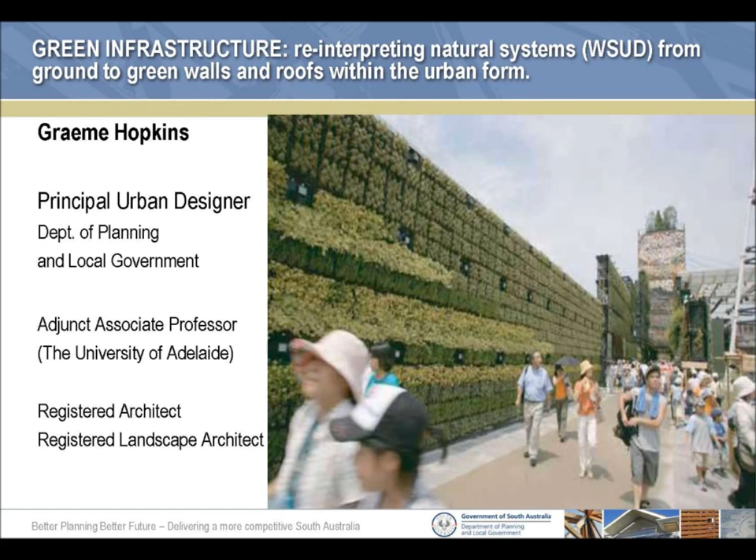I'll be looking at some of the natural systems, not all of them, and briefly talking about some of the interesting work we're doing at planning, especially how we can build up density in the city while maintaining our open space.

First of all, a city is an ecosystem. I'm not a scientist, so I have a very simple definition: an ecosystem is a community of living things interacting with non-living things. I understand that, and I think that's a really simple way to put it.

These systems are considered open systems, as both energy and matter are transferred in and out, resulting in change and evolution over time. That last phrase is really important nowadays, as our ecosystems and weather patterns are changing. Normally this happens over a long period of time, but now it's speeding up, and we have to get in and work with that quickly.

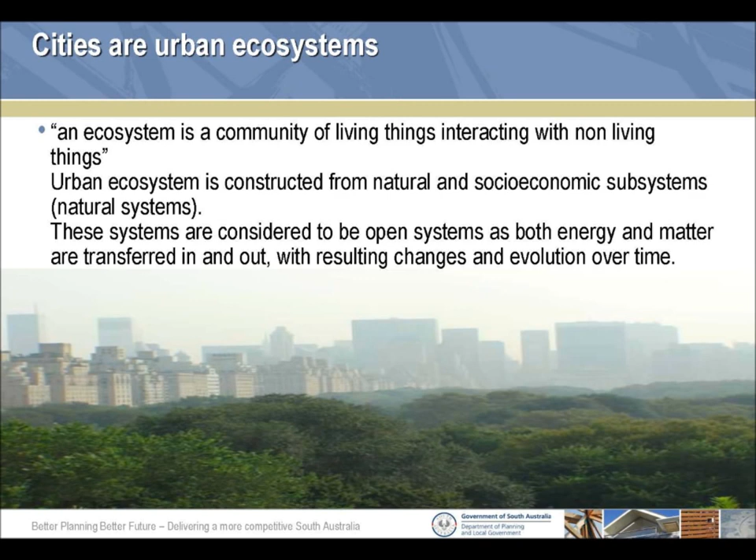So that's one premise. I work on two premises: a city is an ecosystem, and the other is that a city is a water catchment storage area.

If you look at the natural system, you get about 20% runoff of water, or 20% base load of water from the ground, and 27% runoff, like Kangaroo Creek Dam, so about 40% of the rain is caught in that dam—that's if they're not topping it up from the River Murray.

But in a built environment, when you look at the city, your base flow is only 5% because there's very little infiltration, while your surface runoff is 58%. When you put those figures together, the city makes a lot more sense—you've got 63% catchment compared to 47%.

So if we're using those hard surfaces, water runs off, you don't lose it. But the trick is how do we store the water within the city so we can reuse it? There are things like roofs, vertical walls, storing water in road pavement and so on, so we can recover that. Those are the two bases I'm working on.

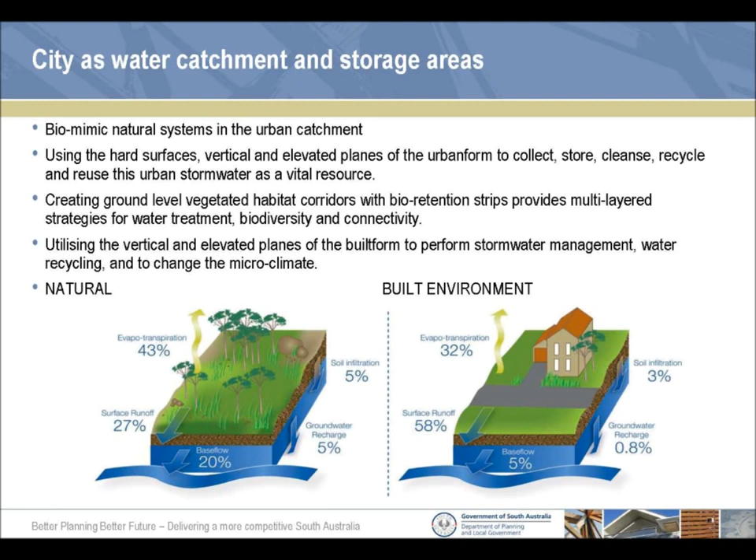This falls into what I call green infrastructure, a common term happening around the world now, and I'm introducing this to government, which is an interesting process in itself. What green infrastructure means, as I see it, is using natural systems in the urban environment.

We're using these natural systems to replace existing infrastructure, such as in this example looking at water. Our cities can't replace the infrastructure—it's too expensive—so we need to find ways of doing that naturally while at the same time enhancing the built environment around us. We can augment this, and it can be a great cost benefit to the state or the city.

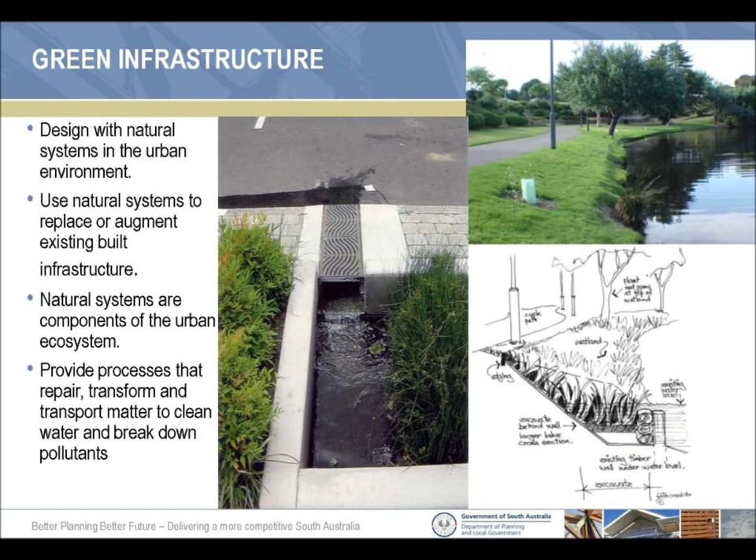The rainfall in Adelaide is going to be quite different from the way it is now. We're starting to see the effects—we'll get about the same amount of rainfall, give or take whatever scientists you believe, but it's going to come in bigger, more intense amounts.

In the top diagram, the purple water is the rainfall and runoff we normally get on paved areas. What's going to happen is we'll get that rainfall in bigger loads, so the blue on top becomes the water volume—those pavements catch a lot more water. If we don't improve the infrastructure to take that water away, we'll have nuisance flooding.

So there are real issues in the built environment. Places like Rundle Mall will get a lot more water on its surface, and the infrastructure won't cope, so we'll get wet feet walking down there, and in an extreme case it might flood into the shops.

So what we're looking at is the bottom diagram, where we reduce the catchment—the paving area. With that intense rainfall, we get a smaller, more manageable runoff, but we put it into the ground, into biofiltration strips, letting the water clean through these systems and soak in. It's similar to work Taylor Cullity did in Melbourne. We're reducing the catchment, and we're currently working with Mount Gambier Council on their new plaza areas using this technique.

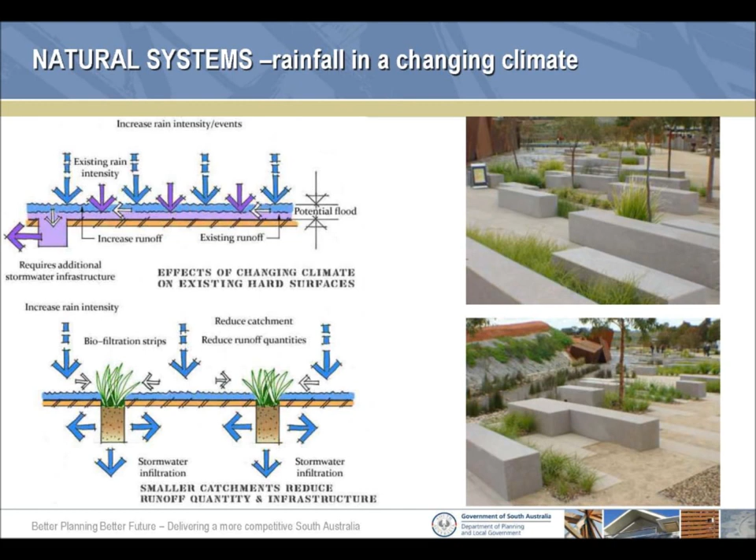So that's sort of looking at rain. Other things we're looking at is how you use trees. Trees are a natural system - they're a heat pump. There's air circulation around a tree within its canopy from its transpiration, with different humidity levels and air pressure, so you get a natural circulation.

This is some work being done, was in America, was for Dubai - whether it's been built now with the financial crisis might be another story - where they're building giant artificial trees, where you actually bring in the hot air. The hot air might be up there at 40 degrees. You spray mist water, which reduces the air temperature, you get a change in air pressure, and you can bring the cold air down through a downdraft chimney effect to bring the temperature back into the mid-20s at the ground.

Singapore are looking at this in their new parkland developments on their waterfront, and they're looking at these artificial trees that are 7 stories high.

Taking that sort of approach - and this is a really old technique. If you remember back, people of my vintage, the old Parliament House in Canberra had the Senate and House of Representatives courtyards with major trees in the middle, designed to pump out the hot air. And if you look at the Treasury building, it did have big scale trees to do it. It's a very old technique.

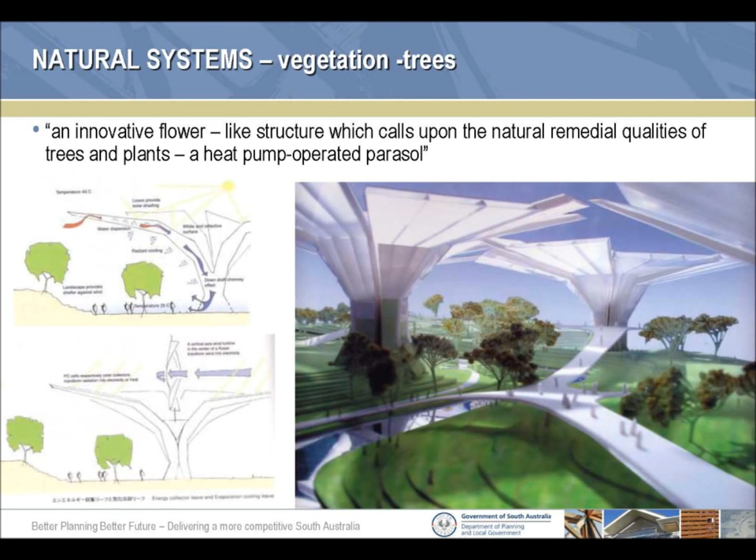Taking that principle, we can look at places like Rundle Mall and outside malls. They're going to become really less populated as temperatures rise and people worry about skin cancer. People are going to move to the internal malls, which have other social problems because they're private land and can exclude different population groups, but they're air conditioned and comfortable.

But if you look at the mall, take that shade structure there - I quickly just did in principle what you could do. You can collect the water on the roof, take it down, store it under the paving, put solar panels on the glass. That will pump the water back up, mist it out, and you start to get air temperature changes and use the downdraft chimney effect to bring cold air and air condition these malls. If you had a series of these, the actual temperature would be reduced, you could attract people back, and there's an economic advantage to those businesses.

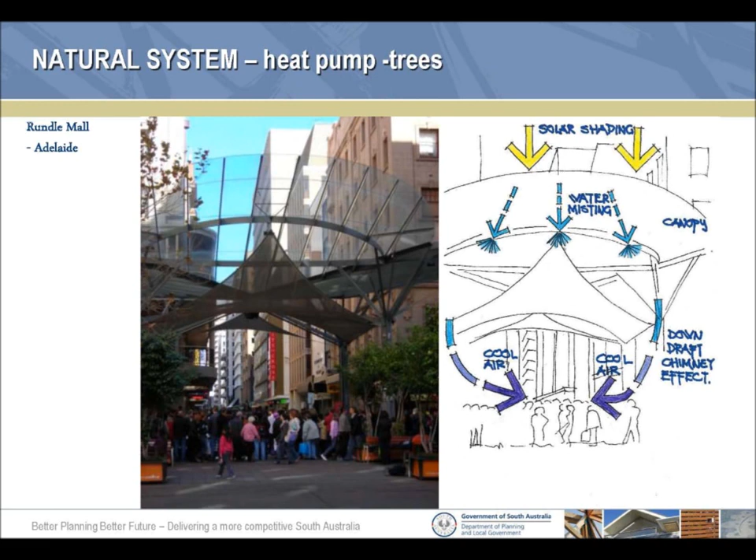So we've got to look at how we handle the public realm, and it's going to be quite different to how we're doing it now. If you take these natural systems and integrate them, they will start integrating with each other, and you can actually treat pollutants and stormwater runoff and so on.

This is a very quick conceptual sketch of a project we're working on with the University of South Australia. We've just got some grant monies to start the preliminary design work where we're looking at treating water, storing it under the road pavement within the airspace of the gravels, using street trees for shade effect, reducing the heat island effect off the pavement, using cool pavements, and recirculating that water back into the buildings as reuse water.

We also start looking at using green walls and green roofs. Green roofs are extremely important for stormwater retention and so on, and green walls are very similar, but we can use those green walls to cool the sun on the walls surrounding this laneway.

That brings me to where my interests are even more developed - looking at green roofs and walls. Green roofs can be used as urban forms; you can do any shape you like, anything nowadays, because the technology's there. These dome roofs are the California Academy of Sciences, where they've actually used the topography to cool air and bring that down into the building to air condition it.

So there's lots of benefits. We can increase shade and insulation, reduce energy costs, and in multi-storey buildings we only have to reduce the amount of energy by a minute amount to get major cost savings.

As Stefan said, the sides of the tower are exposed, but on a tower like the Chicago City Hall, you just shade the top, and that has an effect for only the first few floors. So to me, then, we really need to look at the walls to have greater benefits.

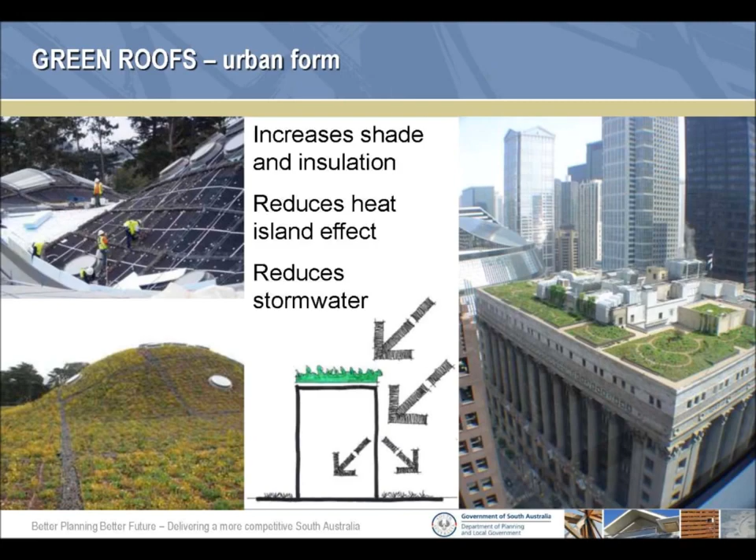But just looking at natural systems we can use on the rooftops, we can use the natural system of natural cooling by plants to cool the ambient temperature around photovoltaic cells. They can actually work up to 20% more efficiently than on a conventional roof. This was a 5-year study by German scientists who have done this work.

And if we were able to say, well, we can get 20% efficiency in a new photovoltaic cell, the commercial world would take that up and say this is a great benefit. We can do this with a green roof, and we have lots of other benefits.

We can actually put constructed wetlands up on the roofs, and this example here is a John Deere factory in Germany, where they actually take the water out of the production line, take it up on the roof, cool it, treat it, and then reuse it back into the production line.

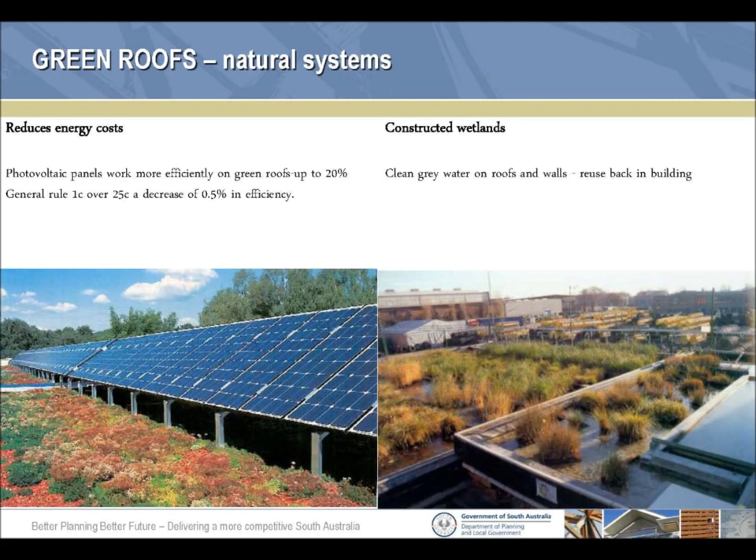So the technology's there. We can actually have a lot of our wetlands up on top of building roofs instead of taking up a lot of ground space, which can be used for other functions. And in a compact city, as we talk, ground space is critical. So if we can use the building fabric to do the same jobs, then that's what we're doing.

If we look at living walls, they give us urban texture to the streetscape and the form. But I think they have a big benefit to the energy use of the building, because if it's a multi-storey building, you've got a lot more surface area you can treat. Technically, it's a bit more difficult. It's not impossible, and with the new systems being developed, the cost is coming down. But again, they've got similar benefits, reducing the heat island effect, and so on.

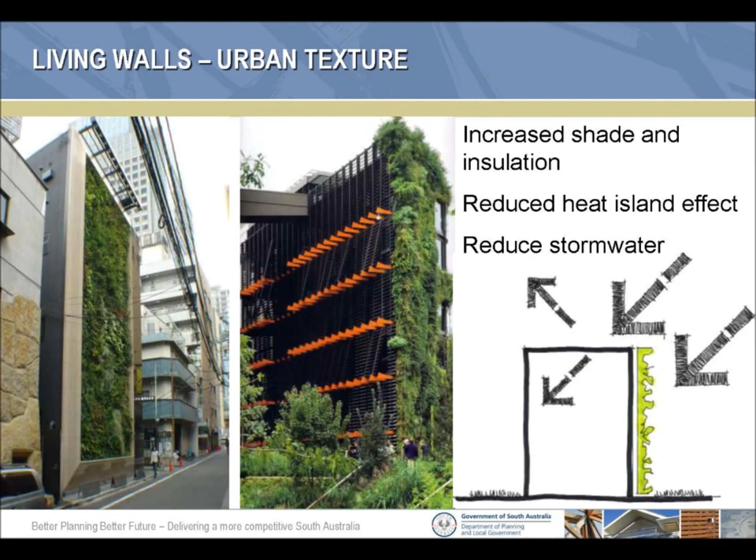But if you look at the living walls, the natural systems, you can actually look at a multi-storey building, and that's a section here on the right, where you can actually use the living wall as biofiltration. You can take the grey water out of that floor, run it through the system and then bring reused clean water back into the next floor and so on. So you get this cascade effect happening right down the building. This technology is available. We can do it now.

And on the left is a vertical wall with a fish pond at the bottom. This is in Toronto, in the Canada Life Insurance Company, where the water from the fish pond area is recirculated up to the top of the living wall. It then cascades down through the living wall.

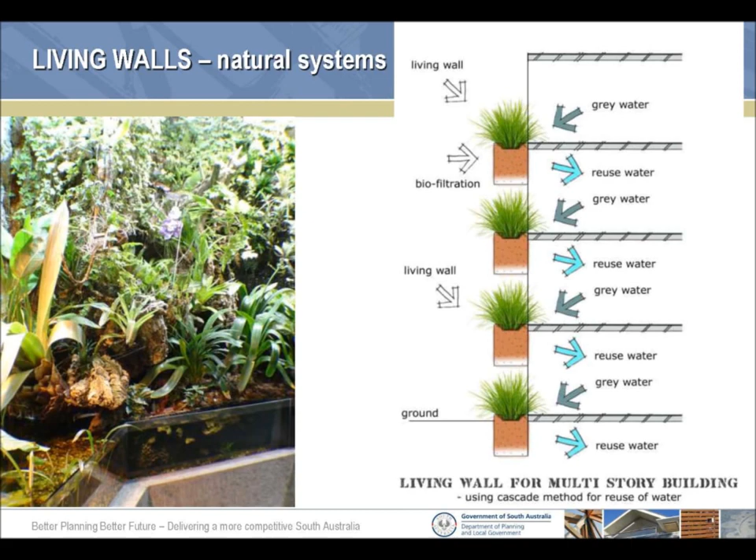The fertilisers, the nutrients, come out of the water. The plants use that as their fertiliser. The water comes back down to the fish pond clean, and it's just a constant cycle going on. So we can actually look at these ecological principles to look at our building facades, and we can do this if we really want to.

If we put those two together, we get this ground roof connection, and this is where I see a great opportunity for Adelaide. This building's in Fukuoka in Japan. It's quite a famous building, stepped there.

But if we had building envelopes and control around our city squares, with buildings that step back with greenery, those city squares would have 4 to 6 times more biomass, and the cooling effect of that would have an enormous effect on the city itself. And we've got 4 major squares and so on. So there's really interesting urban forms to look at in here.

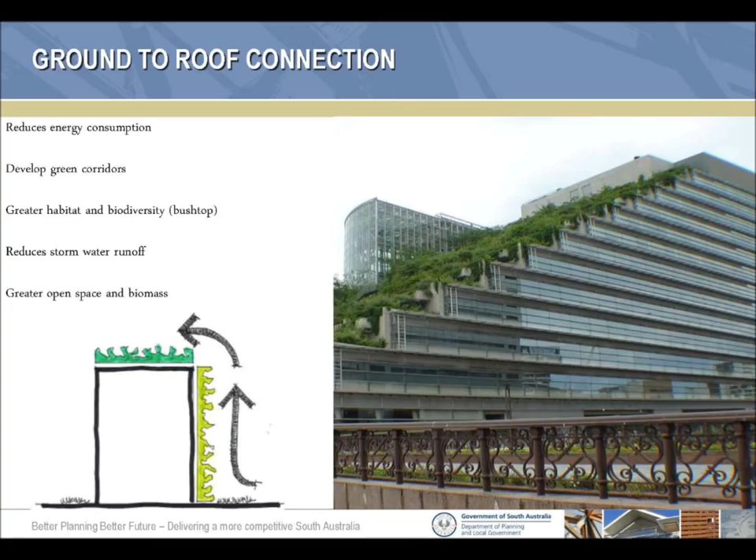If we look at these living walls and green roofs and say they're bush tops, they're ecological habitats, and then say, well, they're the habitats of what was originally here, and this is what I call a bush top. It's basically looking at what was here in the CBD before we converted it. And we put that on our walls and on our roofs. We can actually start getting a mosaic of a pattern running through the city.

The city had migration patterns for insects and birds through it before we built it. So my work is to look at them and to actually set up these stepping stone corridors so we can get those migration patterns happening again. And I'm using a metapopulation theory developed by Paul Ehrlich back in the 70s. This is being developed in California at the moment.

It's the only other place in the world where I know we're working on the same sort of principle, where you don't have to have a corridor that's constantly connected. As long as the distance between the roofs or the habitats is within the migration or flying distance of your targeted species, then they will move along and colonise these areas. So we're looking at the CBD, there's various routes we're looking at the moment.

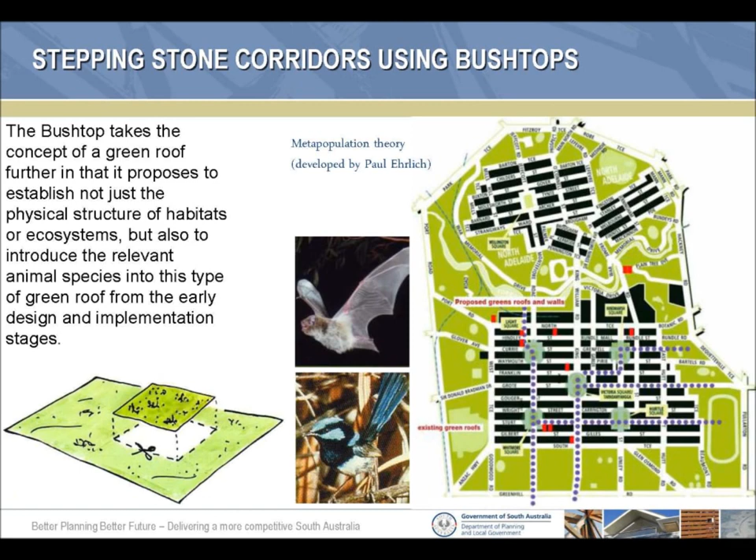This is probably quite important, that we're looking at increasing the open space while we increase density. As this is about the compact city, the top diagram shows how much biomass was there before we developed. We do the general housing sprawl, you get about 25% of biomass left. But if you tilted up that backyard, you actually create more space. You can then put another building on, or another 2 or whatever.

So you can increase the density, and the bottom diagram shows a 3 to 4-fold density increase. We get 25% more biomass open space than we started with pre-development. And it's just a simple calculation of surface area. If we use roofs and walls, we can get an enormous amount of biospace. The only downside is we don't have a lot of deep-rooted zones. But if we do careful design, we can do that.

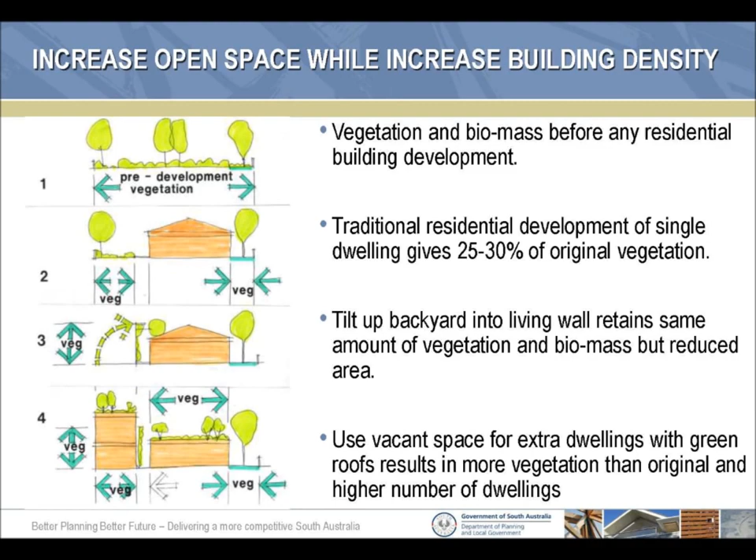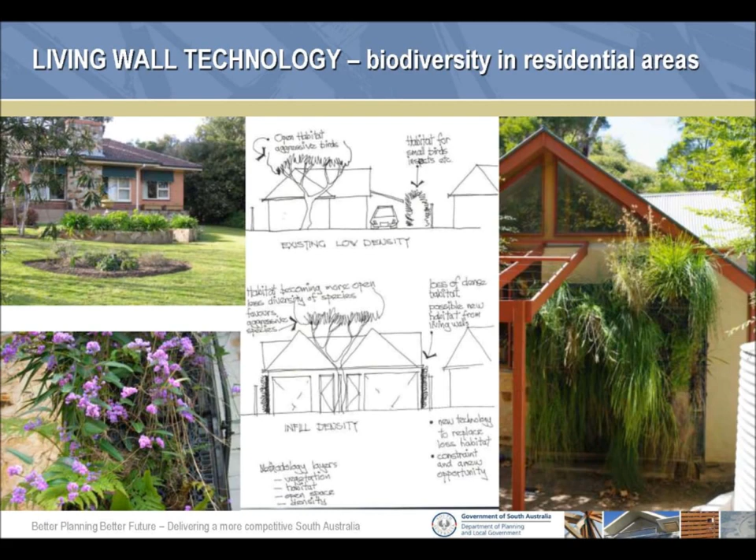When we redevelop, we put 2 houses on the site where there was 1. That hedge is the first thing to go. So that habitat disappears. And what we're saying is this green wall, living wall technology could be put on the house or on the fence to recreate that habitat. We can increase that density when we can maintain the urban habitat. And that's a really important factor. And we take that one step further.

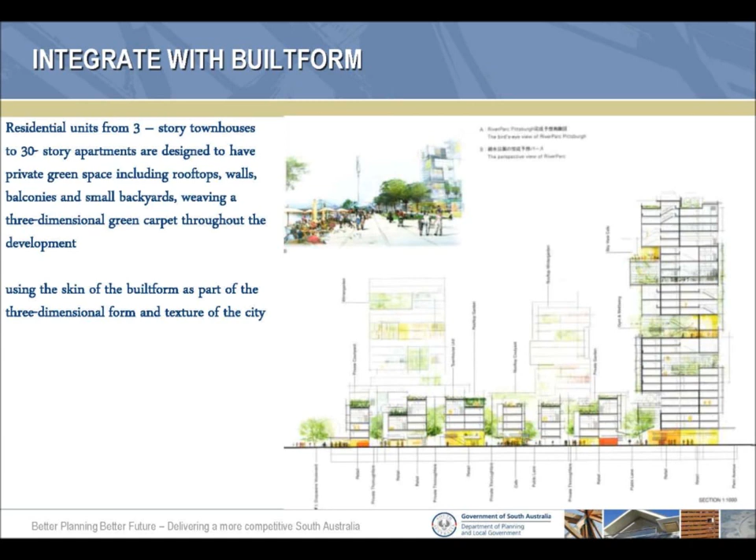We look at really dense, more like TOD-type developments where we can put green roofs, living walls, green balconies, parklands within the city. We form this three-dimensional open space system. And this is really what I'm working towards in the Department of Planning, to get this three-dimensional open space system, because we're used to a two-dimensional everything on the ground, but to get density and to get more open space, that's what we're up to. Buildings should be more.

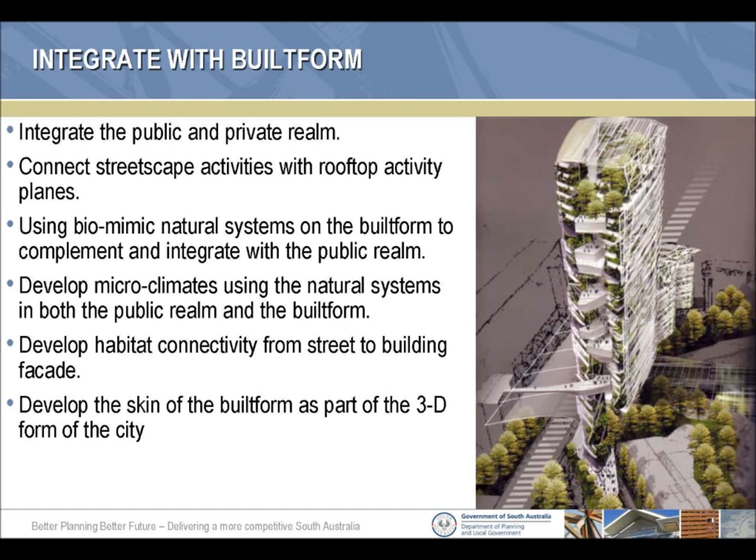This is a Ken Yeang building, as people would recognise. But we need to integrate the public streetscape with the building facade and the rooftop and put it all together. And we're looking at things like the heat island effect and the cooling effect of the city. We started a research program so we can get enough information together in the next 12 months to 2 years to start building envelopes where we can target putting green onto the building in strategic places to absorb the heat or cool the area.

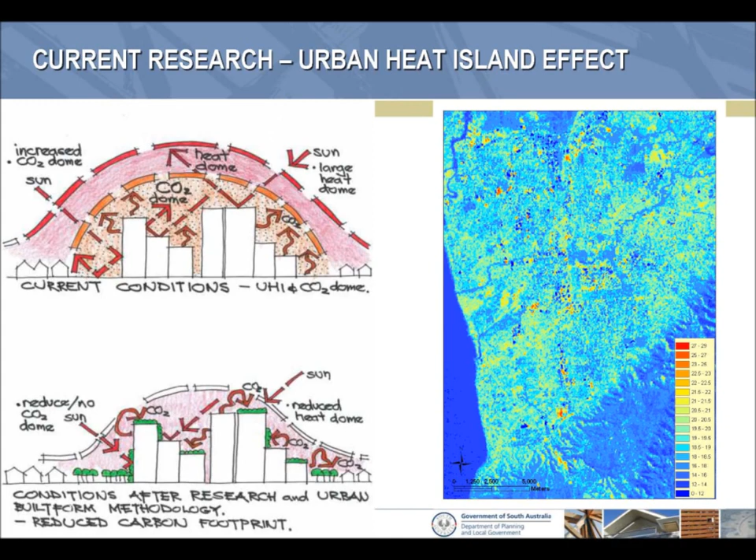But we're looking at it and we've broken it down into 4 elements. The environmental element, to look at adapting to climate change, our bush tops, our habitat process. The lifestyle residential rooftops, where in buildings we've got a lot more green space within the living areas of residential complexes.

The business case area, or the commercial rooftop, where we can have deck chair theatres, we can have child minding centres on top of car parks, with green roof playgrounds, where people, if they've got to drive to the city, drive to City Park and drop off their child there, and even come back at lunchtime if they really wanted to, and then come back and pick up their child and go off.

And the 4th is what Stefan was talking about right at the end, and I agree with him, is food production. If we can grow plants on a roof or a wall, they can be edible plants. So we can have production on roofs, walls and so on. And this reduces the food miles, but there's a commercial element to complement the environmental issues, and these are the things we're looking at in planning.